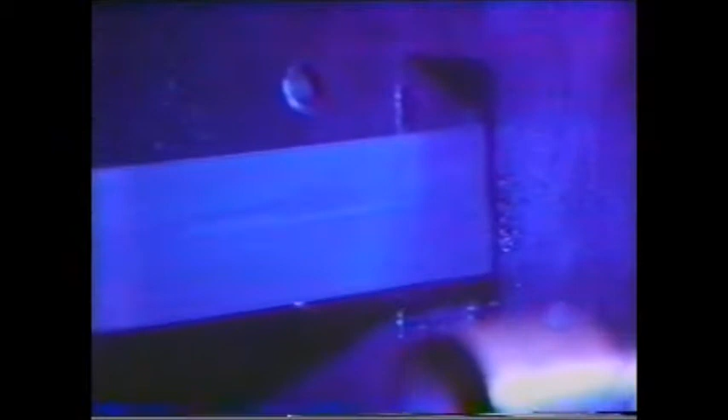Quality. What is this thing, quality, that everyone seems to talk about? That we all try so hard to achieve? Where does it come from? And how is it created? What does it look like? How is it measured? And how can it be protected?

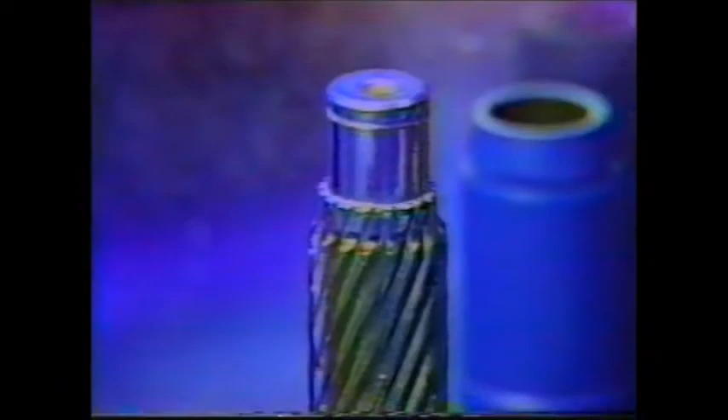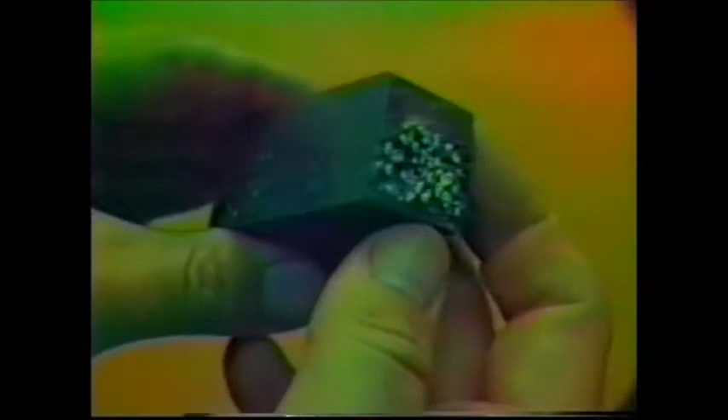The quality of a material is the characteristic that defines its fitness for a particular use. This quality characteristic consists of attributes, physical or functional states that can be measured. Desirable attributes, those that help a product do its job, are called benefits. Undesirable attributes, attributes that would harm a product's performance, are known as defects.

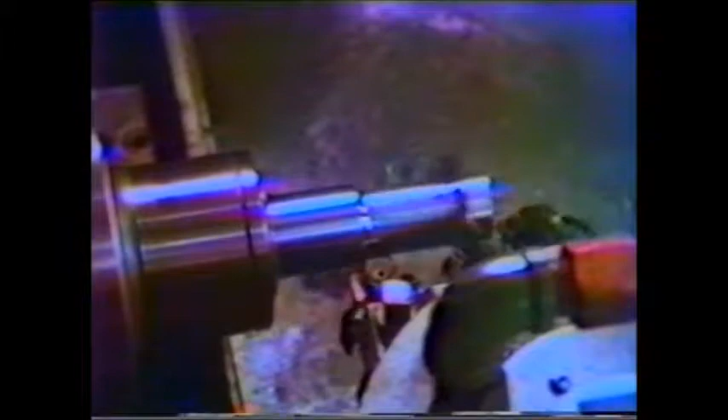The attributes of steel can vary widely in a number of areas. This great range of characteristics is one reason for the tremendous number of steel grades in use today. Some combinations of attributes can be achieved at the same time in one material. Other combinations are mutually opposed. The more there is of one attribute, the less there must be of another.

The positive and negative quality characteristics of these steel grades must be carefully balanced when choosing a steel for a particular purpose. When we're studying steel bar quality characteristics, we find that they can be divided into 5 major groups, the so-called building blocks of quality. These building blocks can be imagined to function synergistically as layers in a quality pyramid.

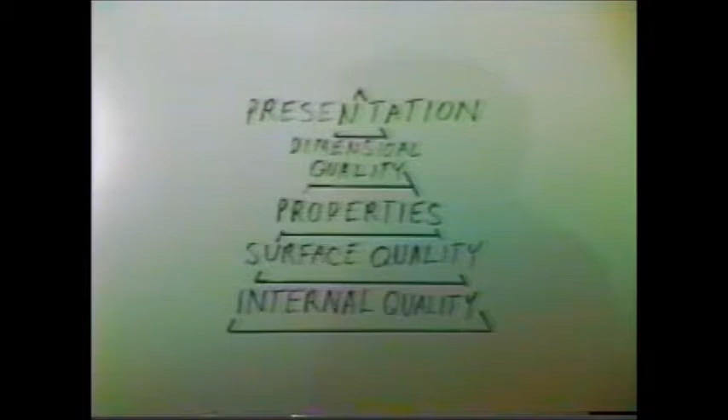These layers would be internal quality, those qualities which are set by the hot mill suppliers, surface quality, which is set somewhat by the hot mill suppliers as well as the cold finishing, properties, which pertain to not only the mechanical properties such as machinability and hardness, but also the strength and ductility, dimensional quality, which is very important with the cold finishers because the dimensional tolerances on a cold finish bar are, for example, 10 times tighter than those of hot rolled bars. And last but not least, presentation.

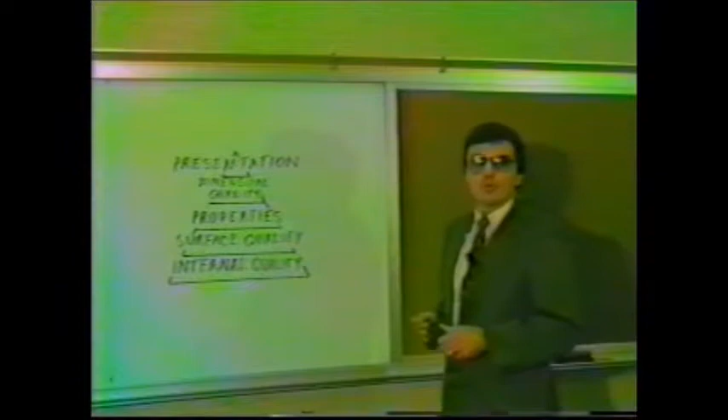The presentation pertains to preserving those qualities by packaging and presenting them in such a way that, for example, the bars do not get nicked or get rusty. This module will pertain to internal quality.

Internal quality is the basis for all the other steel bar qualities, and nothing influences internal quality more than the basic production processes in the hot mill.

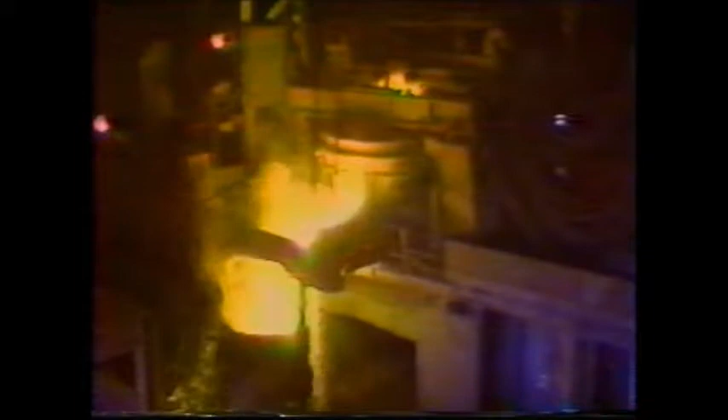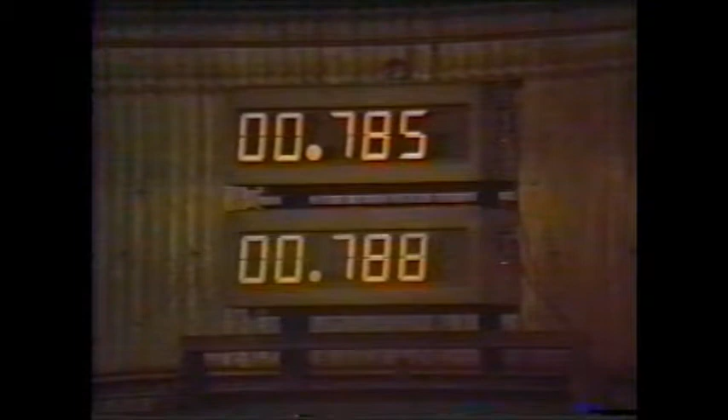The production processes for making the hot-rolled bars used in cold finishing include basic steel making, where iron is turned into steel, secondary treatment of the molten steel to adjust chemistry, temperature and physical uniformity, casting of the molten steel into solid form and its subsequent cooling, and hot rolling practices, which change the size, shape, and internal structure of the still hot steel forms. Many variations are possible in these 4 steps, allowing steel makers to produce steel with combinations of characteristics tailored for specific purposes.

Even the seemingly simple choice of heating methods used to make the basic steel has significant consequences. The basic oxygen furnace, or BOF, takes molten iron that's fresh from the smelter and injects pure oxygen at high velocity to create virgin steel, steel that has never before existed. It takes a great deal of energy to produce this new steel, which has relatively low levels of nitrogen and other residual elements.

The electric arc furnace, the EAF, saves an immense amount of energy by starting with existing scrap steel. This reprocessed steel has a chemistry based on carefully selecting the scrap used in the mix. The carbon and silicon levels are similar to those in BOF steels, but nitrogen and residual element levels are usually higher.

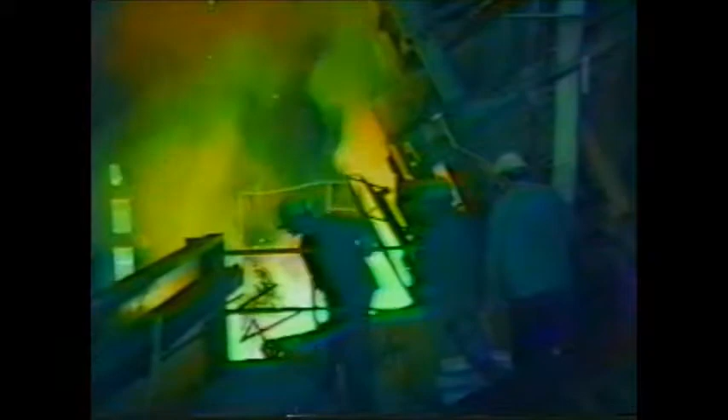The potential energy savings of electric furnace steel must be balanced against BOF steel's relative freedom from excessive levels of nitrogen and tramp elements. There is a way around it in electric furnace steels, and that would be to use more expensive scrap, which is lower in residual elements. But there are also other ways to trim and control the chemistry of the steel, and that is with the use of secondary treatments.

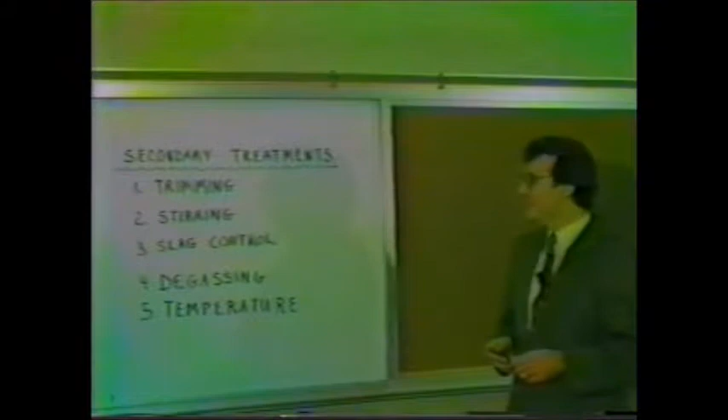These are treatments while the steel is still liquid, just after the steel has been made and is still in the ladle. These are not mandatory, but optional treatments that can be done to the steel, and they are listed as follows.

You can trim the chemistry of the steel and bring it into the ordered range by adding certain amounts of small additions of certain elements.

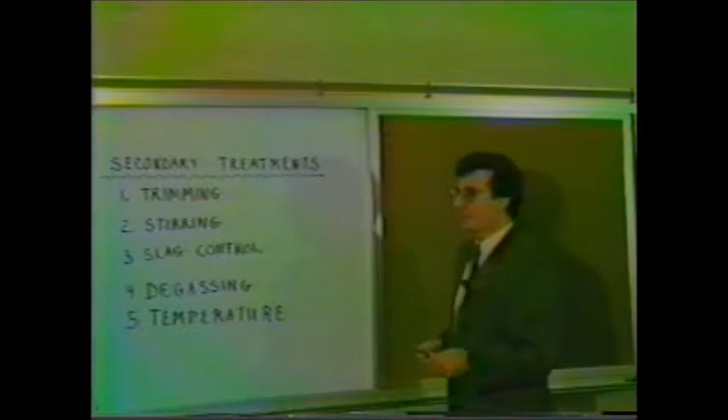You can also use either inert gas stirring or electromagnetic stirring, and the purpose of this is to distribute the bath composition more evenly within the ladle.

The third thing you can do is control the slag, and by controlling the slag, you can be doing things such as skimming the excessive slag, and by doing that, it would promote a cleaner steel.

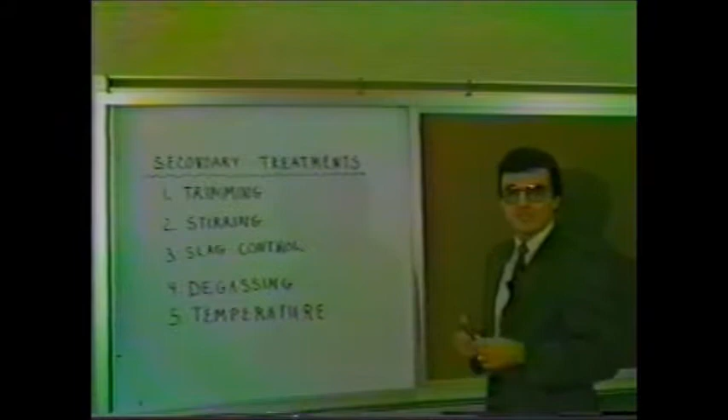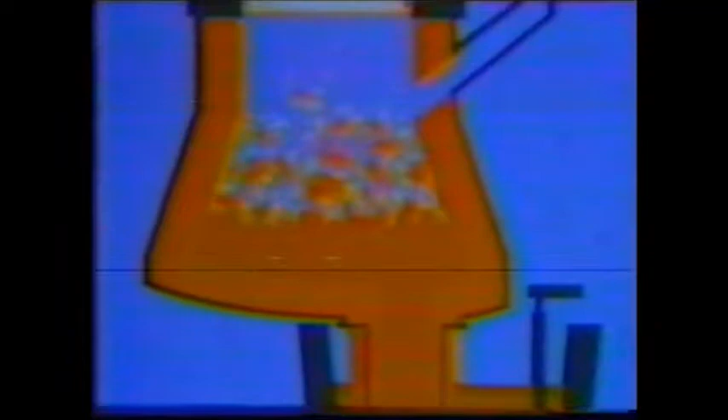You can also degas the steel by pulling a vacuum on the steel, and what that does is pull out the dissolved gases prior to solidifying, and the reduction of these gases will also result in a cleaner steel.

And the last thing you can do is control the temperature with electric arc heating. The purpose of this is to put the steel at the correct temperature and at the correct time when you're just ready to cast it, so it's most optimum for solidifying.

There are two processes used to solidify steel into shapes that are used for further processing. Those are ingot casting and continuous casting.

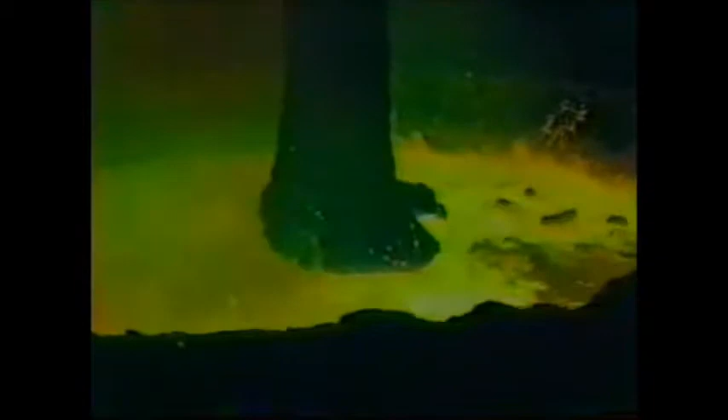In ingot casting, molten steel is teemed from a ladle into a series of cast iron molds that are open at one end. The steel can be top poured into the open upper end, or filled from the bottom with the method called bottom poured.

These two methods can influence the internal quality of the same batch of steel in different ways. Even the shape of the mold can influence internal quality. A mold may have its big end up or its narrow end up. These are also known respectively as big end up and big end down molds. Each shape has its own advantages and a cost associated with it.

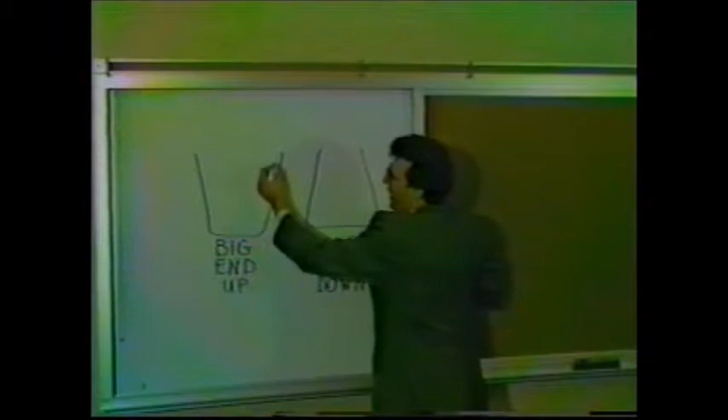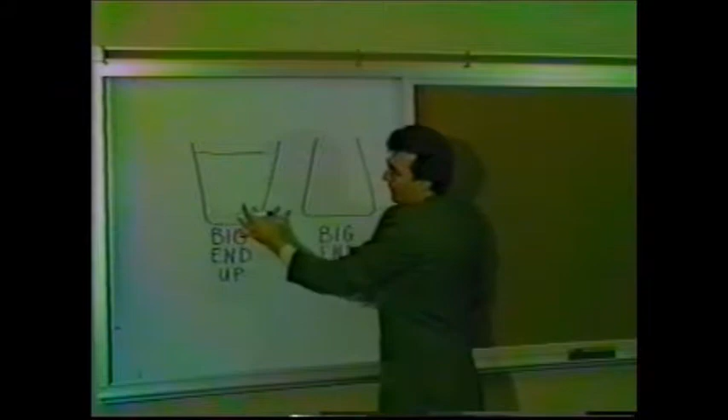In big end up molds, the steel is poured in from the top, filled in here, and the main advantage of big end up molds is that as the steel is poured in, it will start to effervesce and give off bubbles. As these bubbles start to form and float up, they actually float away from the surface of the ingot mold, as you can see.

Contrast that with big end down ingot molds, where when you get bubbles that start to form and float up, the bubbles can actually become trapped at or near the surface of the big end down ingot molds.

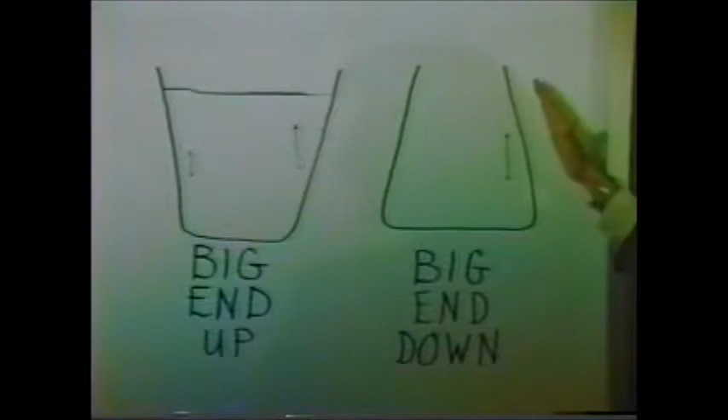You say, well, good grief, then why don't we just use big end up and be done with it? Well, it turns out there are other costs associated with these two things. A big end down ingot, or the product of a big end down ingot, is actually lower cost.

The reason for that is that after the steel has been solidified, it's easier to strip the solidified steel out of a big end down ingot than it is from a big end up ingot mold. Now, at first it doesn't sound right, because how would you get the steel out? But what they do is the big end down ingot mold is actually a two-piece mold.

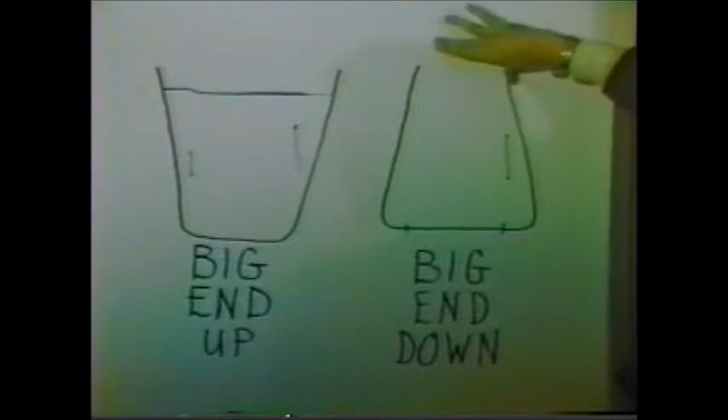The bottom of the ingot is called a stool. What they will do is cast the steel and allow it to solidify. Once the steel has solidified, they can actually grab the top of the mold itself with a crane and just strip the mold right off the top.

Contrast that with a big end up mold. To get the steel out of it, they have to turn the mold on its side and knock it out from the bottom. So there is less cost associated with getting the steel out of a big end down mold.

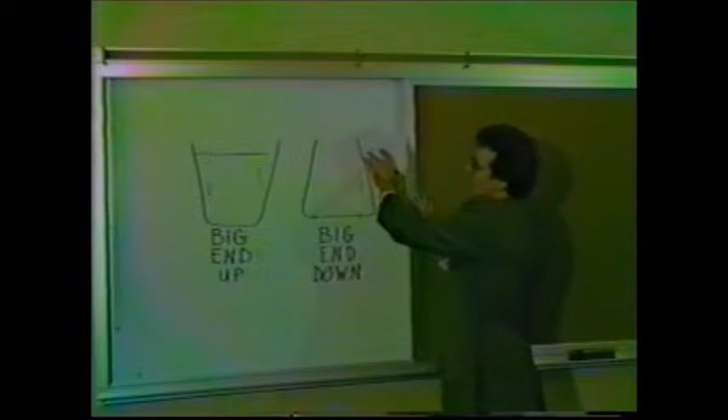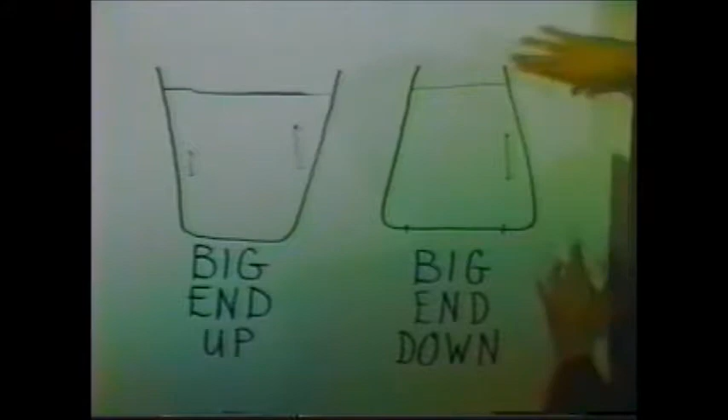Also contributing to a lower cost of a big end down mold is that after filling the steel up, they normally have to discard a certain amount of steel that is unusable for hot rolled bars. If you just look at it, because there's a smaller area up at the top of a big end down mold, there is obviously less volume of steel that would have to be thrown away and recycled, as opposed to a big end up mold.

But again, you have to weigh the advantages. This is lower cost and has more yield from a steelmaking standpoint, but you do have a potential problem of little air bubbles floating up and getting entrapped near the surface of the solidified steel.

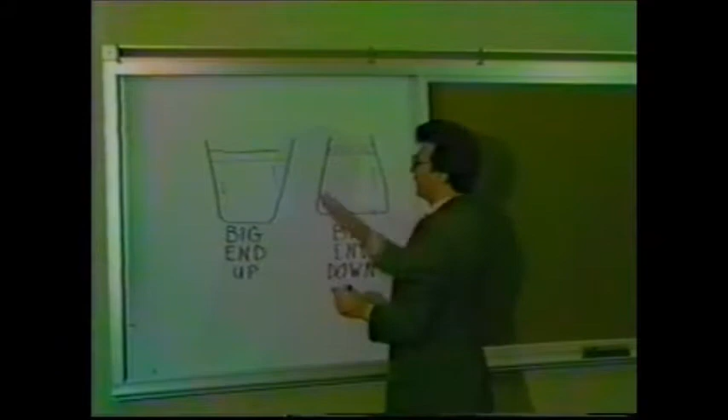Again, with the big end up, it is a little bit more expensive to cast this way because there's less yield in the product, and it is more difficult to strip. But from a surface standpoint, a big end up mold renders steel that has a generally better surface quality.

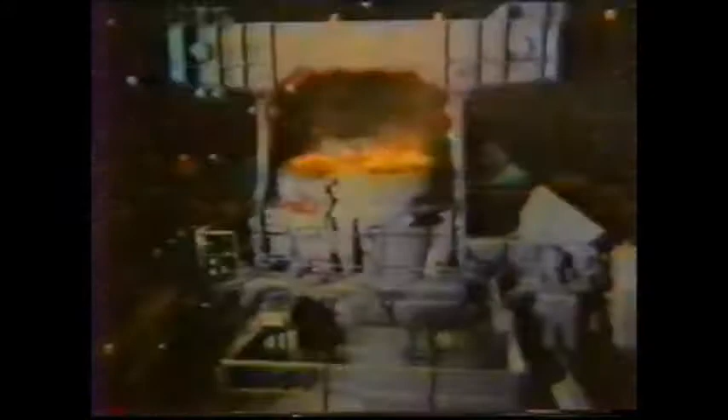Continuous, or strand casting, the other major method of solidifying steel, uses a completely different mold than ingot casting. The mold itself is copper, not cast iron, and it's cooled with water sprays, not air-cooled. Both ends are open so that solidified steel can be drawn out the bottom as molten steel is poured in the top. A movable dummy bar plugs the bottom of the mold to contain the molten steel at the start of the casting sequence.

The molten steel is released from a ladle into an intermediate container called a tundish, then into the mold. Control valves, called gates, in the ladle and tundish allow the levels of molten metal to be held constant in the tundish and mold. And because the mold continuously empties as it's being filled from the tundish, one strand cast mold can do the job of many ingot molds.

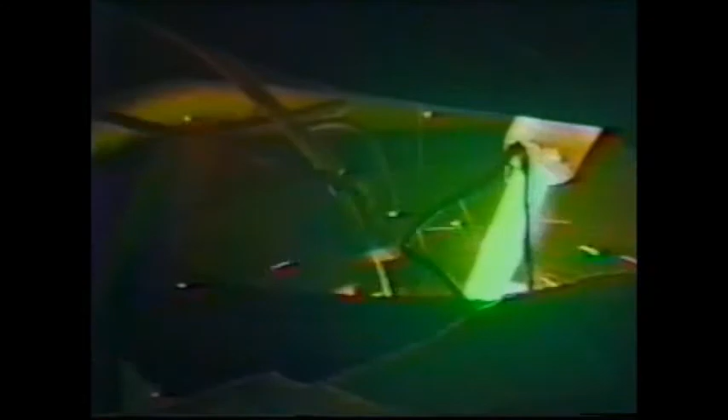The advantage of continuous casting is that you can have one essentially long strand of steel that comes out, and the yield, or the product yield of the steel coming out, is very uniform, and you don't have to discard nearly as much steel as you would if you were doing ingot casting.

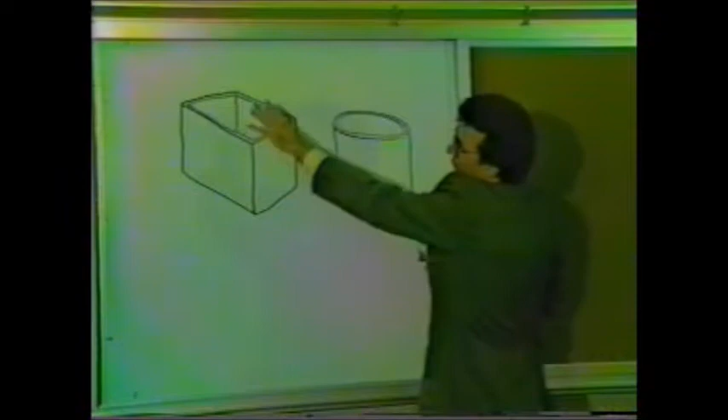There is an optional process called electromagnetic stirring, where you can actually stir the liquid steel within the mold before it solidifies. That can be done with a rectangular mold or a square mold. With a round mold, you can actually spin the mold to accomplish the same effect. The basic effect of either spinning the mold or using electromagnetic stirring serves to homogenize the structure of the steel as it's solidifying.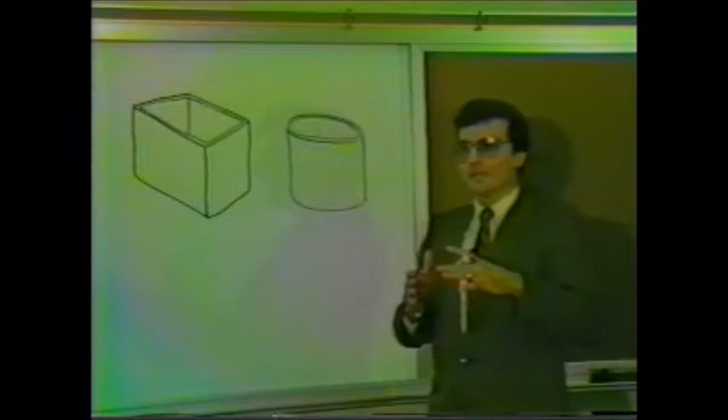By comparison with ingot cast steel, strand cast is much more uniform from the beginning of a heat through to the end of a heat. On an ingot cast steel, which is basically a batch process where the steel solidifies in the actual ingot mold, there are phenomena that happen in the ingot where, for example, the top of the ingot is different in properties than the middle of the ingot, which is different from the bottom of the ingot. It's a solidification type of phenomenon.

But in strand casting, because all of the steel that you're pouring through is basically liquid on the inside, and you're pouring the steel through it, all of the steel sees the same method of solidification, and that turns into more uniformity, again, from the beginning to the end of a heat.

Besides the uniformity, the strand casting process, either with the square or rectangular versus rotational circular molds, allows you to improve the yield of the steel, because as you're pouring all of the steel through, all you have to do is discard the very end of the cast one time. Comparing that with ingot steel, each ingot you would have to throw off the very tops of the product. So there is a yield saving with strand cast steel.

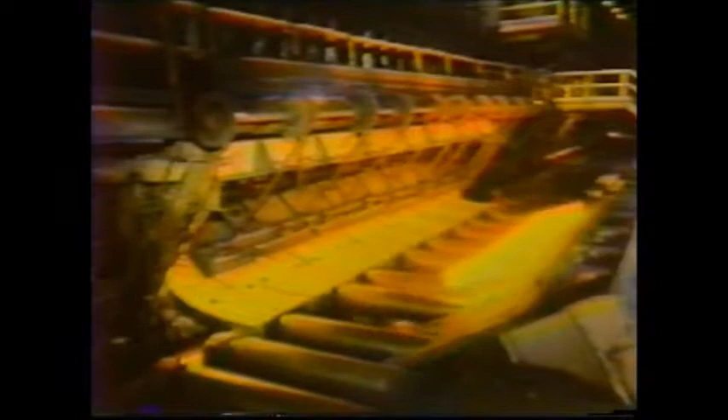The final step in the production of hot-rolled bars is the hot rolling process. As steel cools, it typically forms extremely large grains that make it unusable for bars. Hot rolling, squeezing and reforming the steel above certain temperatures, can reduce these grain sizes to suitable dimensions, and in addition, aids in dispersing non-metallic elements more evenly through the iron structure, called the matrix.

The greater the reduction ratio, the original cross-section area compared to the final cross-section area, the more efficient and effective this process becomes. So, though it takes more energy to reheat and roll larger beginning ingot or strand cast sizes, these provide greater final hot reduction ratios for a given final bar size.

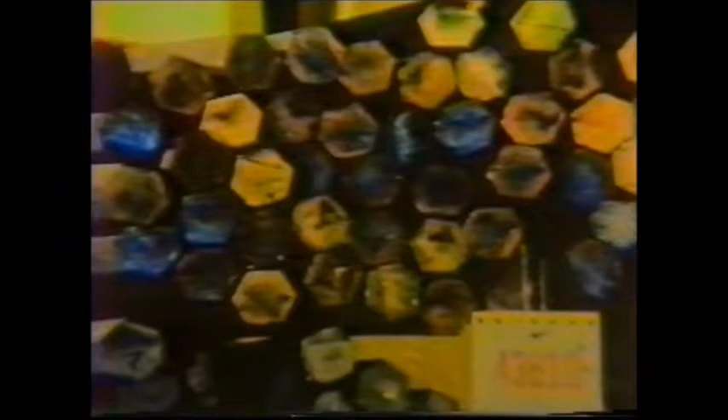Following hot rolling, bars will often undergo various tests for surface quality.

Internal quality characteristics can be placed in 4 groups of related items: chemistry, structural integrity, microstructure, and inclusions are categories which define certain types of quality characteristics related to internal steel bar quality.

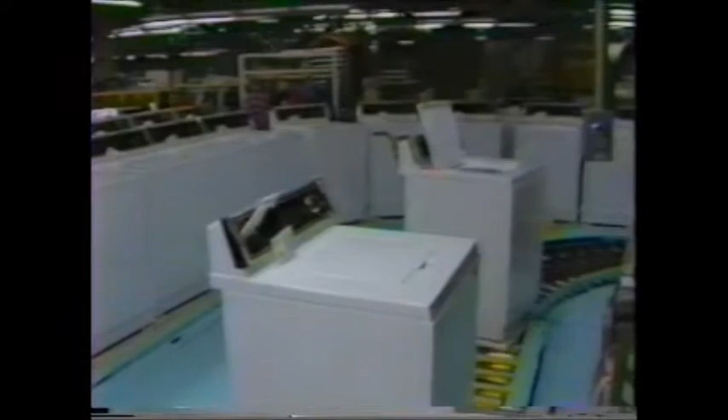The chemistry of a steel is the particular mixture of chemicals that makes up that batch or heat of steel. The way a steel will perform in service is influenced more by its chemistry than by any other internal quality attribute, because chemistry plays a major role in determining the final state of the other internal qualities.

Many chemical elements are employed to create specific effects in steel. The way they act in the steel and modify the effects of other elements is complex, but there is some basic information that is useful when evaluating a steel's fitness for a specific purpose.

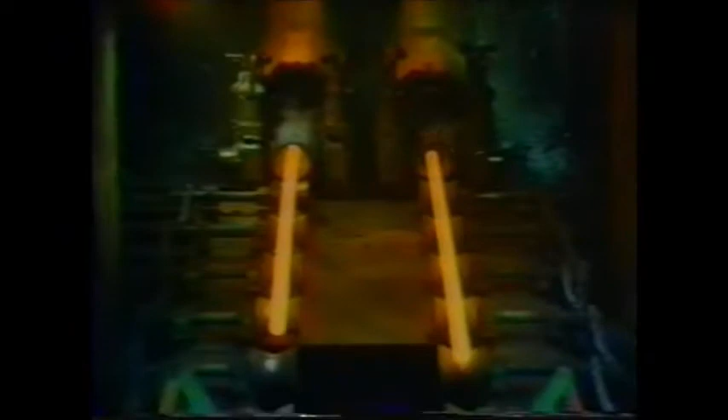Steel used to produce cold finish bars are generally produced in 2 broad categories: carbon steels and alloy steels. By far, most of the steel sold in the U.S. are carbon steels, and the main alloying elements for carbon steels are naturally carbon and manganese.

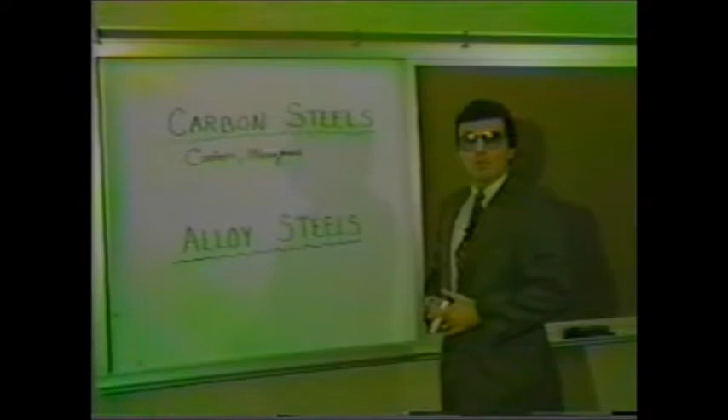The other elements, such as nickel, chromium, molybdenum, which are part of the chemical composition in carbon steels, are generally referred to as residual elements. Carbon and manganese are the primary elements in carbon steels.

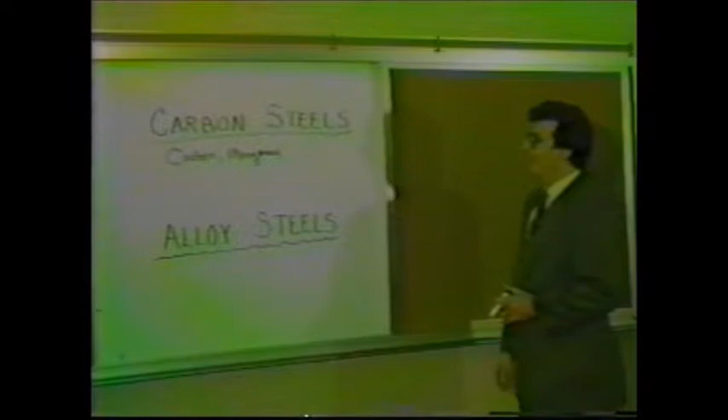People who do machining will also specify a minimum content of sulfur, and they may specify also lead or bismuth as a machinability additive. One more important element in carbon steels involves the choice of silicon.

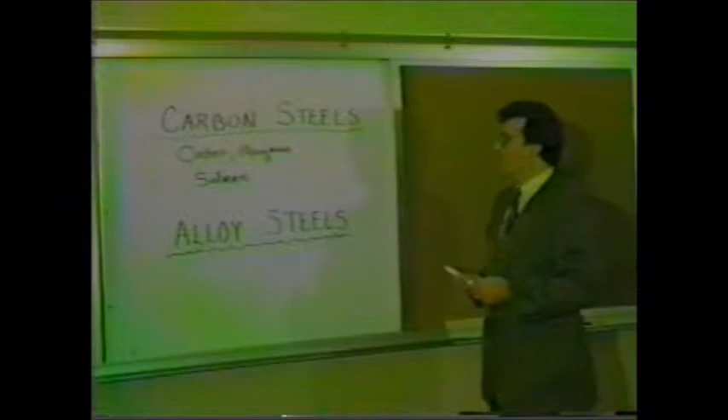Certain grades of steel are ordered specifically without silicon, and these steels are generally called coarse-grained steels in the carbon steel family. The presence of silicon with other elements are called killed steels, and when you have aluminum or vanadium or columbium in there, these steels are also called fine-grained steels.

Now, again, with carbon steels, you have a choice of using killed steel versus non-killed. And basically, the choice of killing a steel or not involves trade-offs.

The presence of killed steel will generally improve the surface quality of the steel. That is because there are elements that kill the steel that will actually gobble up air bubbles or carbon dioxide bubbles in the steel as it's solidifying.

However, the presence of these elements can also be detrimental to machinability. So again, for people who machine steels, namely in the free machining steels, these people would not buy aluminum, vanadium, columbium in their steel, and they generally do not specify silicon in the steel.

Another broad category of coarse-grained steels would be the 1144 steels, 1141s. These have sulfur in them for purposes of machinability. They are carbon steels, and depending on the desired level of surface quality, a grade like 1141 or 1144 steel can be ordered with or without specific amounts of silicon in them.

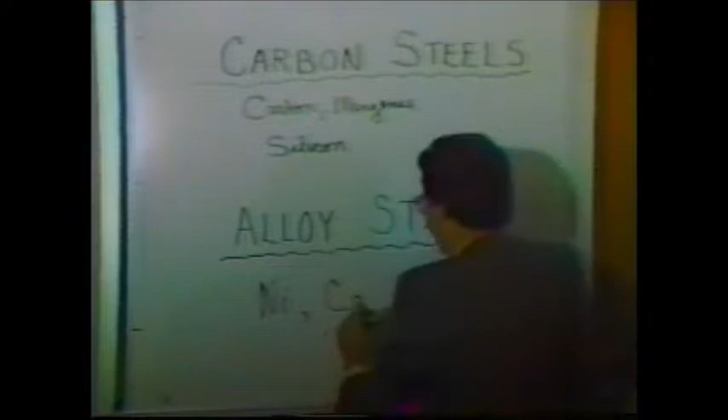Now let's contrast carbon steels with alloy steels. Again, alloy steels have as one of the basic elements carbon, but generally the alloy steels have combinations of either nickel, chromium, or molybdenum. I'll just use the chemical symbols for them: nickel, chrome, or moly as it's called in the trade.

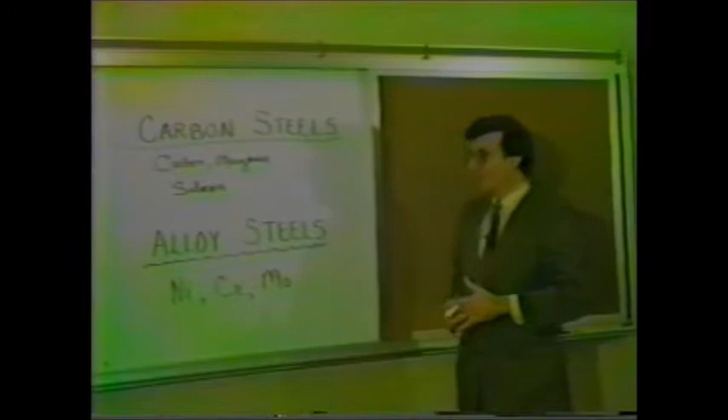Now, what distinguishes these from the carbon steels is that someone would purchase specific additions of these three elements, and the reason someone would buy these in an alloy steel is that there is a desired response to heat treatment.

Now, these elements are expensive, and if you can get away without using them, if you need, for example, only to machine the steel, or you do not need a specific strength level that is achievable with heat treating, you can get away without these.

But there are customers who do need to have a response to heat treatment, and they will specify levels of nickel, chromium, and molybdenum in their alloy steels.

Now, the cold finish steel bar industry handbook has a description of all of the different elements that go into steel, as does your workbook.

Again, some of the other elements besides carbon would be manganese, phosphorus, sulfur, silicon, nickel, chromium, molybdenum, and then some of the grain refiners, which would be aluminum, vanadium, columbium (also known as niobium), titanium, and various other elements. Again, they are in your cold finish steel bar handbook.

The other two types of steel, which we'll not really get into, involve tool steels and stainless steels. But because cold finish steel bars generally have no implications with these groups of steel, we'll say no more than just to mention them here.

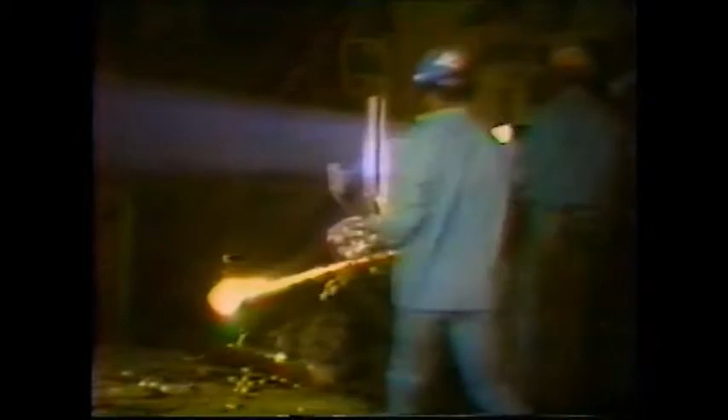The exact amounts of alloying elements are calculated to produce specific attributes. To ensure that the final levels of these elements are within the required ranges, chemical analyses are made of samples from both the molten steel, called a ladle analysis, and from the solid hot mill form at the bloom, billet, and hot-rolled bar stages, known as a product analysis.

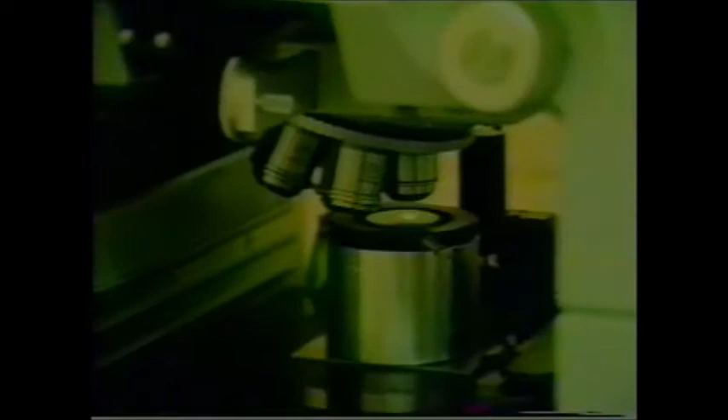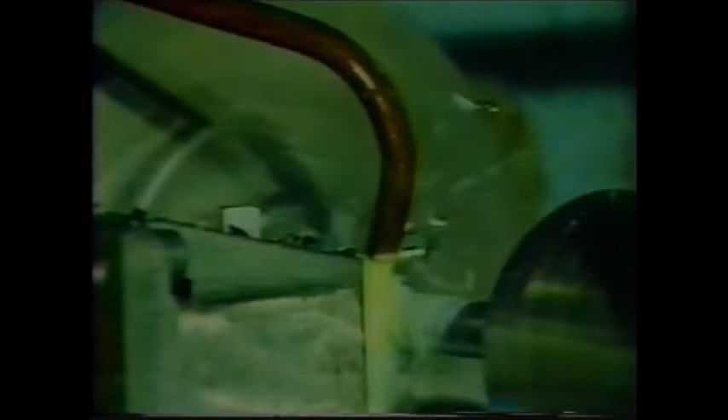The results are provided by the hot mill supplier in a report to its customer. These report values can be critical to the selection of the proper steel, especially when the level of an alloying element is being held to a very low level, as it often is in microalloyed steels.

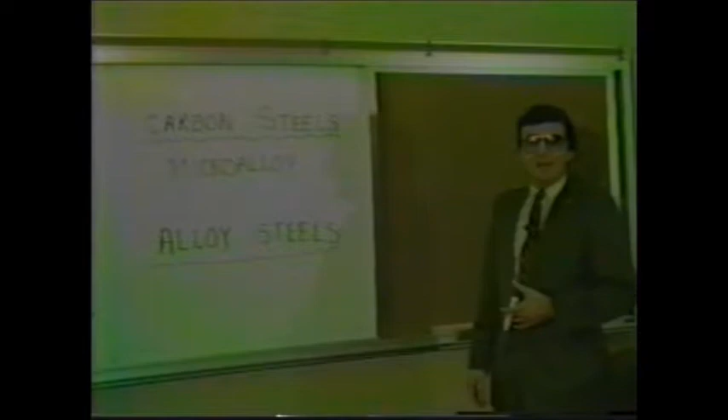There's another class of steel which is in between the carbon and alloy steels, and these are called microalloyed steels. These are sometimes also called HSLA steels, which stands for high strength, low alloy steel. Microalloyed steels are characterized by increased strength and good ductility while still in the hot-rolled condition, as opposed to cold drawing. The strength of microalloyed steels is gotten by putting in nitrogen in the steel in combination with vanadium, columbium, or titanium.

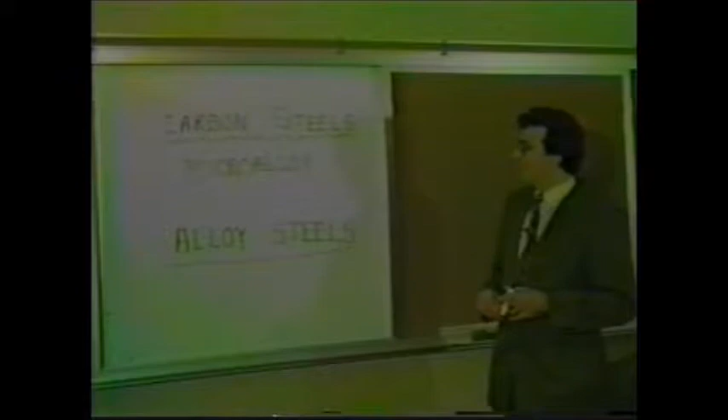Another group of elements that can also be placed into microalloyed steels are what are called residuals of nickel, chromium, or molybdenum, sometimes copper and zirconium also. But the amount put in of these elements is nowhere near that amount for alloy steels. Again, it's just to increase the strength of the steel in the hot roll condition.

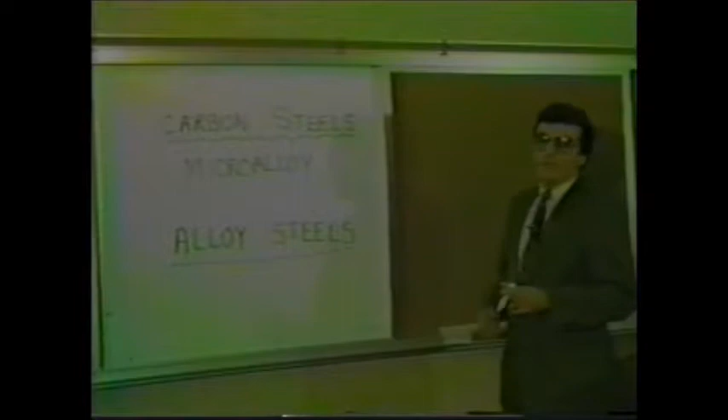A microalloy can be made with either the same tensile strength or yield strength as that of cold finished steel bars, but cannot do them at the same time. Tensile strength refers to the ultimate strength of the steel that you can pull on it before it begins to break, begins to neck before breaking. Yield strength refers to the amount of stress that the steel can take before it permanently deforms.

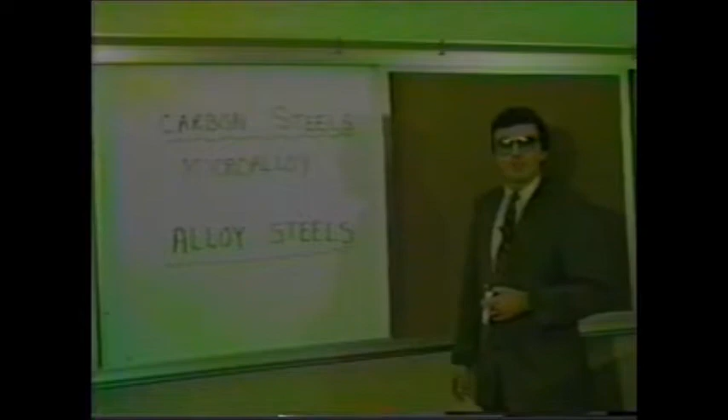If you have the microalloy steel that has the same yield strength as a cold-drawn bar, it turns out that the tensile strength of the microalloy is more than a cold-drawn bar, and therefore its machinability is not quite as good as a cold-finished bar.

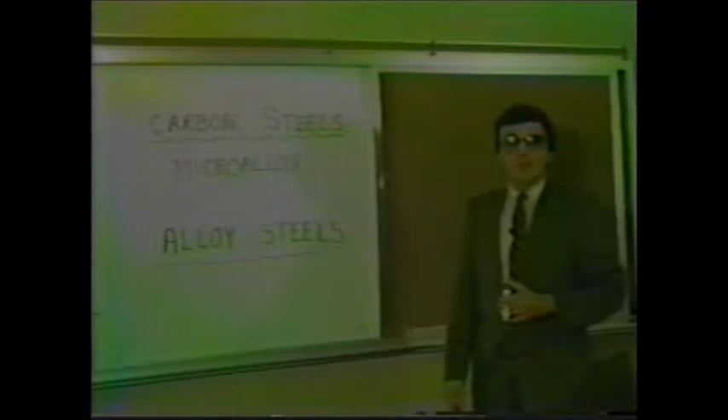Also, if you have a microalloyed bar that has the same tensile strength as a cold-drawn bar, it will have a lower yield strength. Another aspect of microalloyed bars is that they can be cold-drawn. When you cold-draw a microalloyed bar, you can achieve strength levels that could not be gotten with cold-finished bars of the same grade alone.

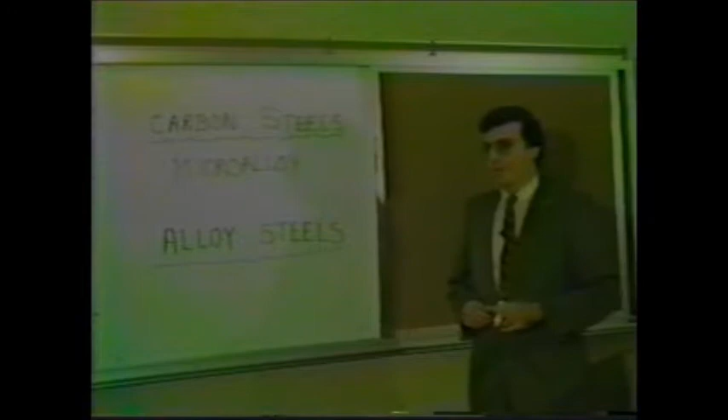Now, all of the strengths and elements that we're talking about are all contingent upon the bars having a good internal structural integrity. The category of internal qualities called structural integrity includes the attributes known as pipe, unsoundness, and segregation.

There is probably no normal use for a bar with pipe. Pipe is an internal defect that begins in the casting process. As an ingot or continuous steel strand cools, a hollow area can form in the end. This hollow consists of oxidized and decarburized steel, scale, and occasionally non-metallic deposits.

If this pocket of materials isn't completely removed in the shearing step known as cropping, it will be rolled into the finished bar as a central hole. These surfaces cannot be rolled together in the hot mill and will always remain a structurally weak area.

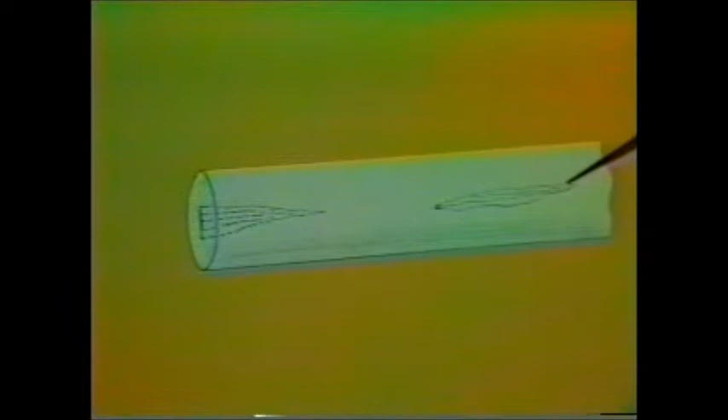Pipe that runs to the end of the bar can usually be spotted in a visual inspection. Secondary pipe, which is closed on both ends, can't be seen, but can be detected by ultrasonic inspection. Sound waves created at one end of the bar will be reflected by the internal walls of the secondary pipe and returned to the end of the bar to be detected and displayed on an oscilloscope screen.

Unsoundness is an internal defect that may be caused by too high a casting temperature and too little hot working. Often called porosity or looseness, this defect occurs during solidification of a cast form, when dendrites, very long crystal grains of steel, grow inward from the already cool solid skin.

As the steel form cools and contracts, the dendrites tend to contract more than the solid skin, leaving open areas between the grains near the center. Atmospheric oxygen never reaches these surfaces, so adequate hot working can re-weld them into a solid bar again. This defect can sometimes be detected by ultrasonic inspection.

One other type of internal integrity characteristic is segregation. When steel solidifies, it tends to attract mostly iron atoms to the grain structures that form. This forces other elements to remain in the molten portion, concentrating them in the areas that solidify last.

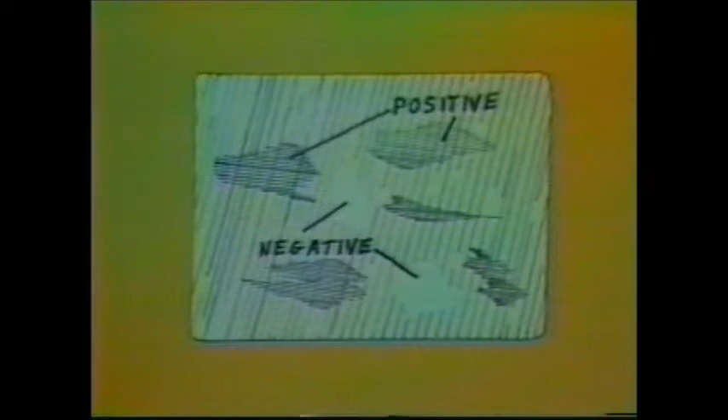Slower cooling rates give non-metallic elements more time to migrate, resulting in areas that are much higher in a concentration of these elements, positive segregation, or lower, negative segregation. Temperature effects like convection currents and gas bubble formation provide many areas for segregation.

Thus, killing a steel, that is, adding a chemical to absorb the gas bubbles, can often lower the levels of segregation. The detection of segregation involves a hot acid etching process to speed up the different rates of surface etching, followed by microscopic examination of the etched surface.

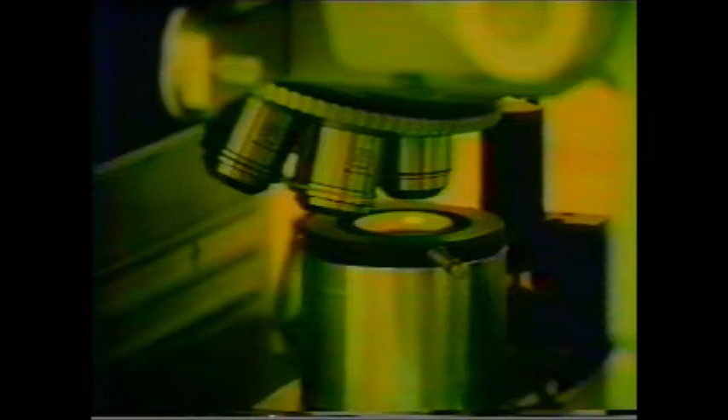Much can be discovered about the composition and structure of a steel by such microscopic viewing. The way steel is organized on this fine level is known as its microstructure. A steel's microstructure is strongly influenced by its chemistry and by the way it cools.

At about 1330 degrees Fahrenheit and above, iron can dissolve nearly 2% of its weight in carbon. Below this point, it can hold only 0.02% of carbon by weight, only 1/100th as much as the hot phase. The final microstructure is determined by what happens to the rejected 99% of the carbon as the steel cools from its high-temperature austenite phase to its room temperature ferrite phase.

The rate at which this cooling takes place is one of the major factors in this process. Three different types of microstructures that can be obtained with the different cooling rates of the steel are pearlite, bainite, and martensite. Pearlite is generally the most desired microstructure for machinability, and it deals with the steel cooling through 1330 degrees at the slowest rate of the three different structures.

If we jump for a second to martensite, the cooling rate for martensite is so fast that the carbon in the steel at high temperature does not have a chance to diffuse into the low temperature steel. In other words, the carbon gets locked in as to where it was when it was at the high temperature form. So when you lock in the carbon, you create a very hard structure called martensite. This structure is very desirable in terms of alloy steels when you want to heat treat for high strength, but it is absolutely no good for machinability.

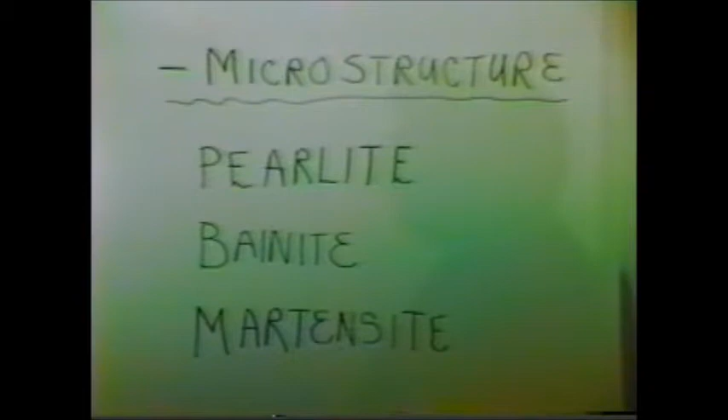And then there is one more structure that falls in between martensite and pearlite, and that is called bainite. Essentially, let's just call it an in-between microstructure, which is determined by a slightly faster cooling rate than forming pearlite, but not so fast as to form martensite.

Pearlite shows up as a series of alternating black and white lines, which are platelets of iron and iron carbide seen on edge. If these structures are held near 1300 degrees Fahrenheit for an extended time, the platelets contract into rough spheres. This is known as a spheroidized grain structure.

Bainite appears as a feathery iron carbide structure. Structures vary slightly in the two available types of martensite. The untempered martensite, straight from a quench bath, shows no obvious structure, no grain boundaries. Tempered martensite, which has been heated to just below its phase change temperature, has a structure resembling small needles, although there are still no details to define grain boundaries.

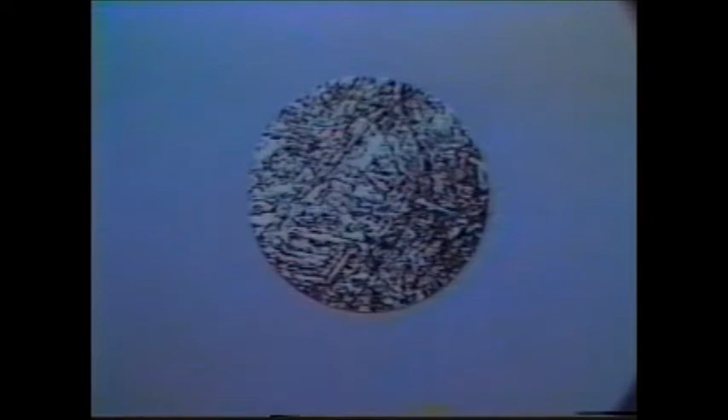These microstructural differences can often be used by metallurgists to determine the hot rolling and heat treating histories of steel samples. But if the structures are so very small, how can we see them to make such a determination?

So far we've described the different types of microstructure, pearlite, bainite, and martensite, but we really haven't talked about how you can actually see these different microstructures. After all, they are very small. The way it's done is with the aid of a metallurgical microscope, also called a metallograph.

We're not going to really describe exactly how a metallograph works, except to say that we look at a polished sample that has been prepared and polished to a mirror-like finish, and we have to actually eat away the surface of the steel with acid to reveal the structure of the steel.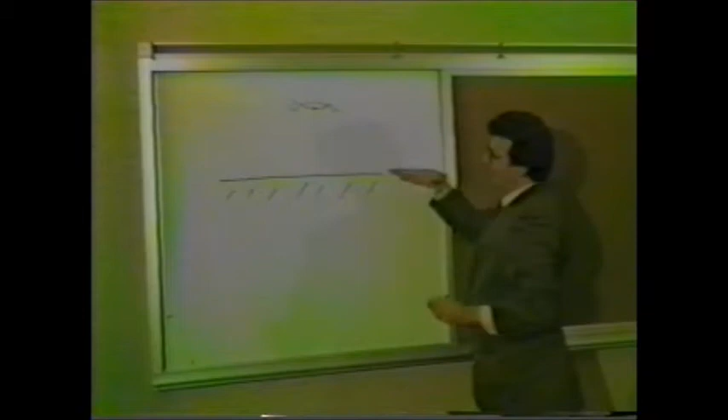Now, what I'd like to draw for you is a surface of a steel bar. Let's say this is the inside of the structure here. And up here, this represents your eyeball looking down at the steel with the metallurgical microscope. Now, if you take a piece of steel and you haven't etched it in acid or anything to reveal the structure, as the microscope looks down at the surface, there's such a flat surface here that you can't see anything. All the light gets reflected back up, and this steel surface just looks plain and white. We don't see any structure.

And what we have to do on this piece of steel to see what the structure is underneath—in fact, I'd like to just draw a few of the grains of steel underneath that happen to intersect the steel that we're looking at here. Bear with me just for a second.

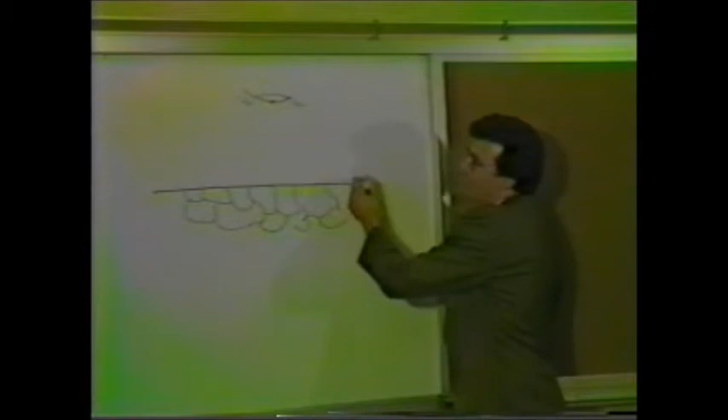Now, what we do is we etch the steel with a very light solution of nitric acid in methyl alcohol called nital. We'll dip the surface of the steel in the acid, and the effect that it has is that it eats away the steel.

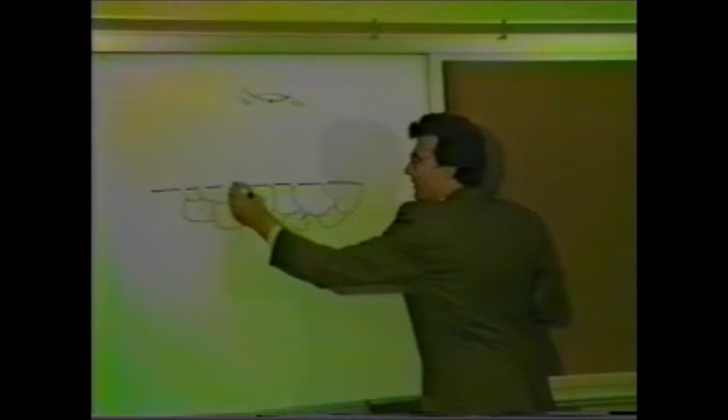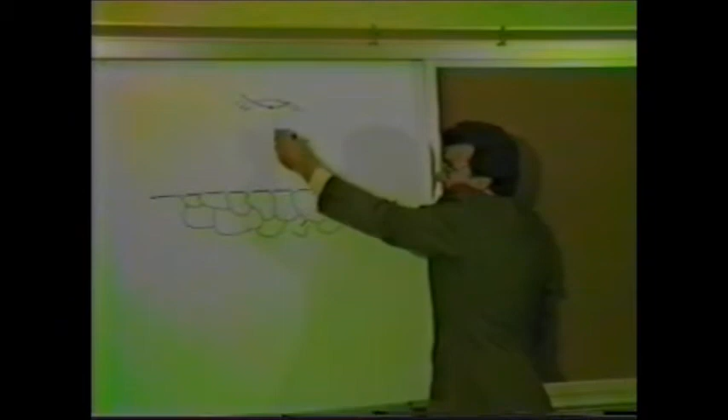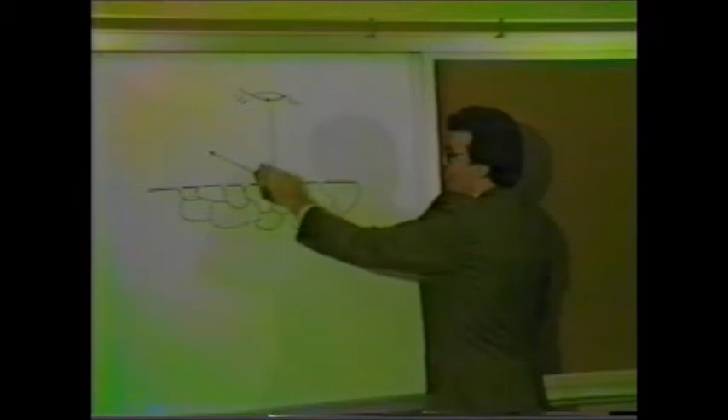Although acid eats away the surface at one rate, it preferentially eats away the grain boundaries at a different rate than the rest of the surface. This puts a little bit of relief into the surface of the steel. As the microscope looks downward, any area that is still flat gets light reflected straight back up, and that area looks white. But where the light intersects an area where the grains are, it bounces off to some other angle and does not get reflected straight back up into the microscope, so the grain boundaries appear as dark lines. This is how you can see the structure of steel on a polished sample that has been etched in acid.

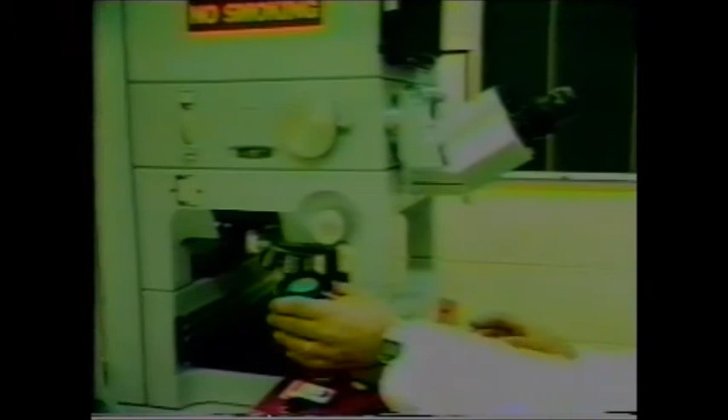Not only the shape, but the size of the steel grains is revealed under the microscope. It's possible to measure the grain size of high-temperature austenite with a procedure called the McQuaid-Ehn test, but grain size is typically measured in room temperature ferrite, also using a metallurgical microscope.

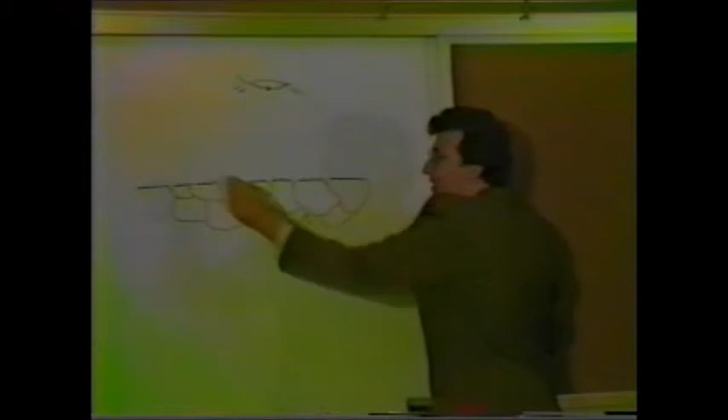Typically, the magnification level used is 100x. As you look at these grains, you want to get an idea of their relative size. The American Society for Testing and Materials, the ASTM, has a formula that tells us whether the steel is so-called fine-grained or coarse-grained. We scan the steel at 100x magnification and count the number of grains that would intersect a 1 square inch area, viewed at 100x magnification, and count the number of grains in that average area.

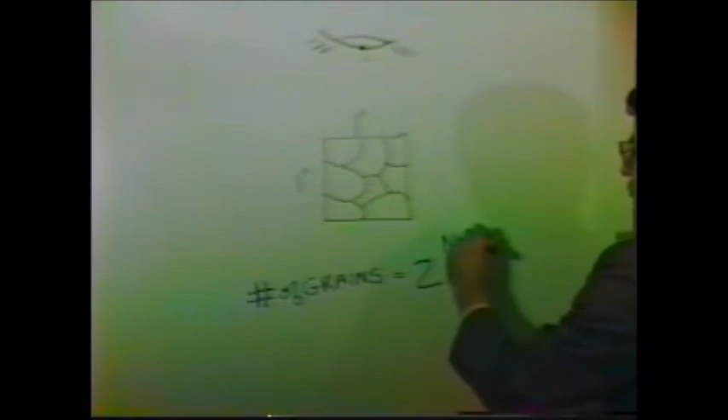You plug the count into a formula: the number of grains is equal to 2 to the n minus 1. The number n is the grain size that's reported, which we'll discuss next.

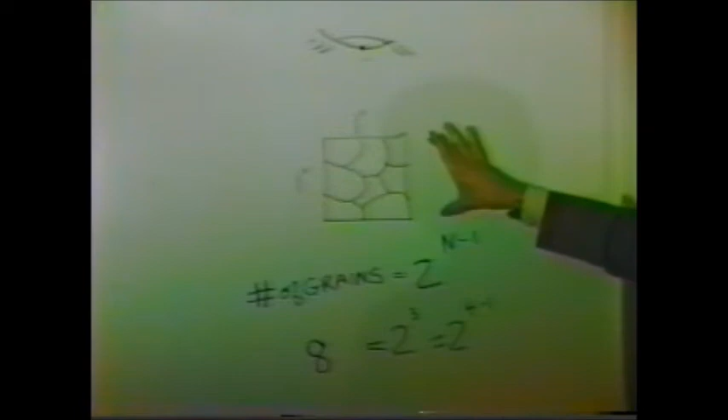Let's take an example. Say you counted an average of 8 grains in a 1 square inch area viewed at 100x magnification. 8 is equal to 2 to the 3rd power. So n minus 1 has to equal 3, meaning this is 2 to the 4 minus 1, or 2 to the 3rd power. If you found an average of 8 grains in 1 square inch, the grain size number n would be 4. If there were more grains, the exponent would be a larger number, and the grain size number would be higher.

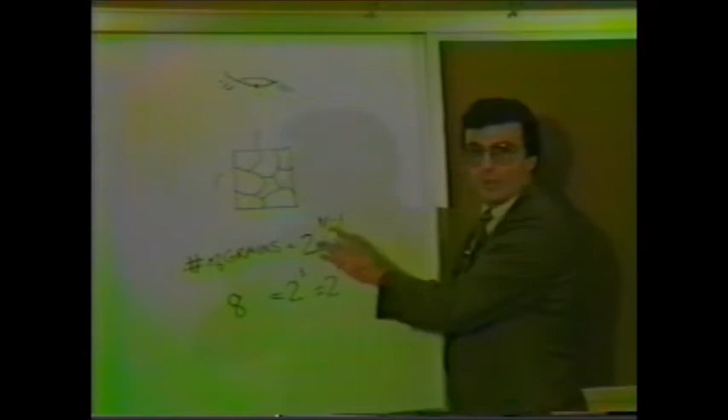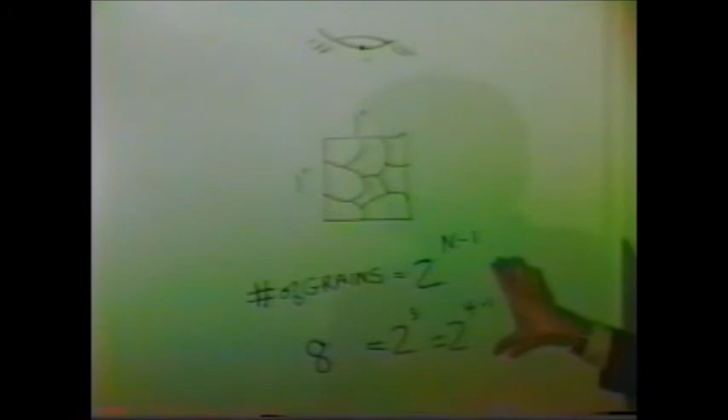Of course, when measuring grains, we're not including the inclusions. Inclusions are non-metallic particles in the steel grain matrix. These structures can come from chemicals added to alloy or deoxidize the steel, or from worn, high-temperature linings that insulate ladles and other steel-making tools.

The larger examples can be seen with the unaided eye, but inclusions are normally detected and analyzed with the help of a metallograph or an electron microscope. Inclusions may also be deliberately created by the addition of lead or sulfur to produce free machining steels.

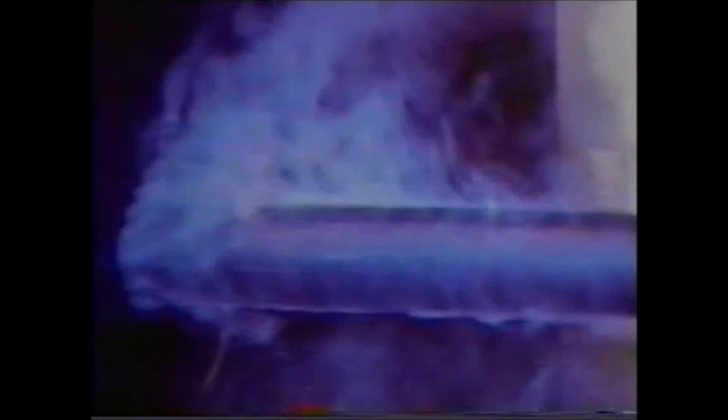All four groups of internal quality attributes are essentially created and fixed in the bar during the various hot mill production processes. Cold finishing will not normally correct internal hot mill defects, but close inspection can prevent most defective materials from being used as raw material for cold finished products.